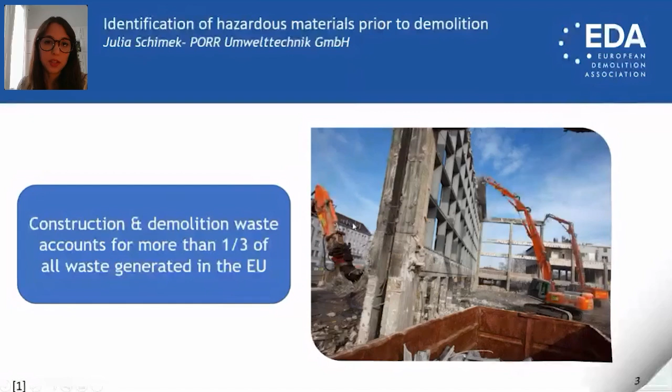So construction of buildings doesn't only generate waste during the building process, but most of the waste is actually generated when buildings are demolished. So more than 1/3 of all European waste generated is construction and demolition waste. You can see the impact the proper recycling of construction demolition waste can actually have on a goal of achieving a circular economy. But how does the situation actually look like in Austria?

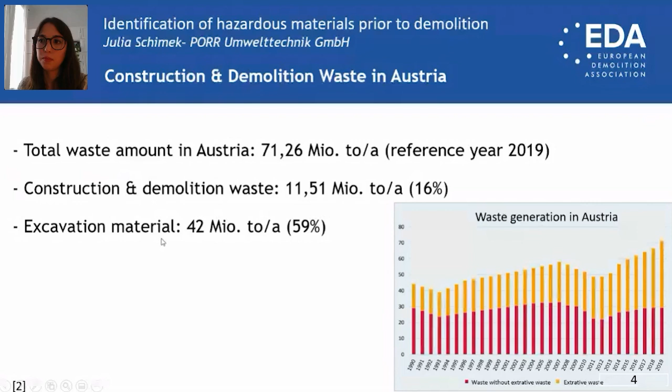So what are actually the reasons for recycling of construction demolition waste? On the one hand, the generation of reusable materials, as you use construction demolition waste, you recycle it and produce recycled product, which can then be led back into the construction sector. Second, you therefore decrease the resulting waste, which is especially important nowadays in order to save landfill volumes. And also in Austria, it is already very difficult to receive a permit for landfill sites, and it won't really get much easier in the future.

Furthermore, you can also achieve a reduction of environmental impacts and also save primary resources. And you also minimize costs by using the resources more efficiently. And in case of a proper recycling with even selective dismantling, you can also generate sorted fractions of construction demolition waste. So for example, concrete, and mixed waste fractions will be decreased. And the better the waste fractions are sorted, the easier will be the recycling afterwards and also less costly.

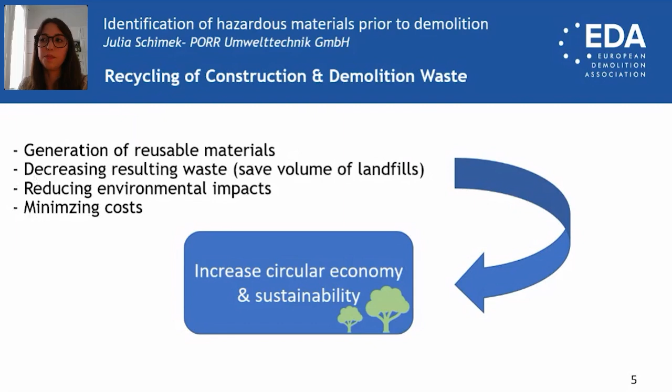So in order to enhance circular economy, we should not only take into account the life cycle of the building, but also the life cycle of the building material. At the moment, there are actually two prevailing treatment ways after demolition. On the one hand, landfilling, and on the other hand, recycling construction demolition waste. But when having in mind the European waste hierarchy and also a sustainable approach, recycling should definitely be favored.

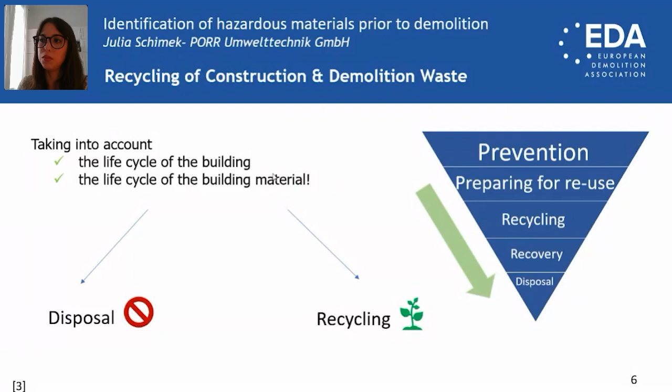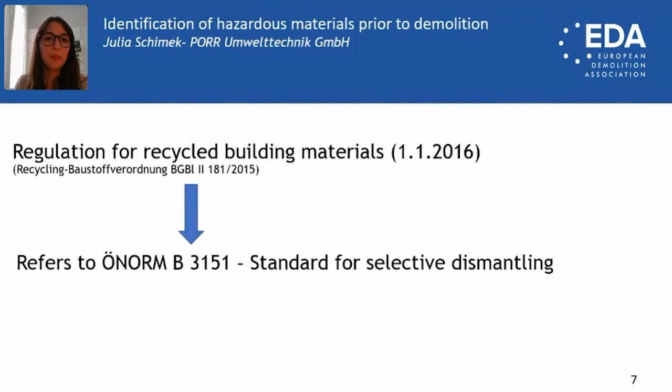So in order to enhance a circular economy, it is inevitable to set up regulations which address the production, but also the use of construction demolition waste, so addressing really the whole cycle of these materials and not just one point in the cycle when producing recycled construction materials. So in Austria, we have the regulation for recycled building materials, which has been introduced in 2016. This regulation also refers to a different standard, which addresses selective dismantling like the Austrian standard B3151, but I will go more deeply into the topic later on.

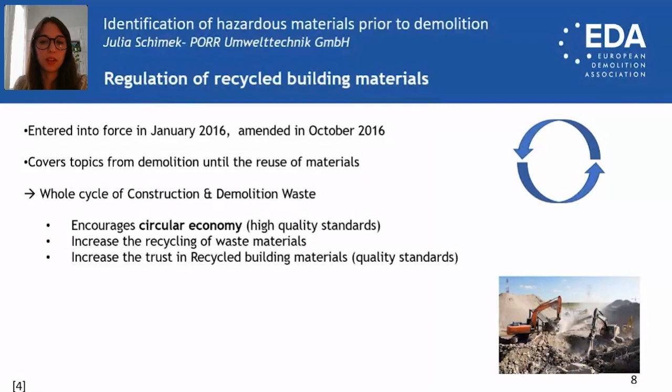So this regulation was introduced in January 2016 and has already been amended in October 2016. With that amendment, the possibility of reaching an end-of-waste status has been introduced according to the European Waste Framework Directive. And with that possibility, Austria is actually one of only very few European countries having an end-of-waste criteria for construction and demolition waste. This regulation also introduced high-quality standards for recycled building materials, which should also increase the trust in these materials and therefore increase the recycling again.

So now I will go deeper into the topic of this regulation, so the sections it actually covers. So first of all, the duties during construction demolition activities. The regulation lists requirements that have to be met during demolition activities. So for example, it specifies when and under what conditions an investigation for pollutants has to be conducted. And furthermore, the obligation for dismantling and separation of waste streams also arises from that regulation. So only non-hazardous waste is allowed to be used to produce recycled building materials, and hazardous substances and materials like asbestos, for example, as well as other impurities have to be removed prior to the treatment step of the waste.

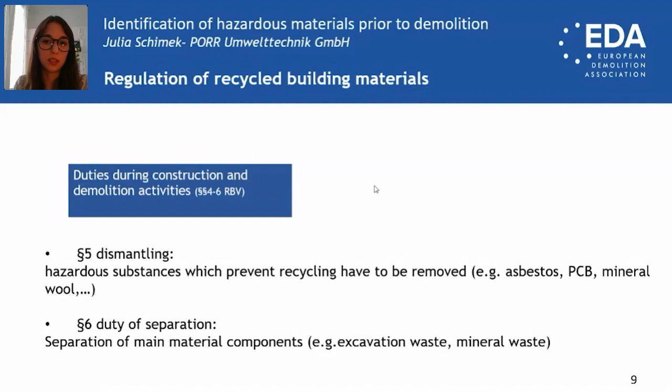Then the regulation also covers the production and use of recycled building materials. This section actually specifies that recycled building materials are only allowed to be produced from certain waste types, which are listed in Annex 1 of the regulations. So for example, concrete waste. Hazardous substances are prohibited from the production of recycled building materials, as I have already mentioned.

And in Annex 2 of the regulation, you can also find relevant quality requirements which have to be met by producers of recycled building materials. So thresholds for total contents and also for eluates exist for different types of quality and also for different types of recycled building materials.

The regulation also comprises areas of application for each quality and for each type of recycled building material. And it also mentions bans for the use. So for example, specific materials can only be used in bound applications, whereas other qualities can also be used unbound.

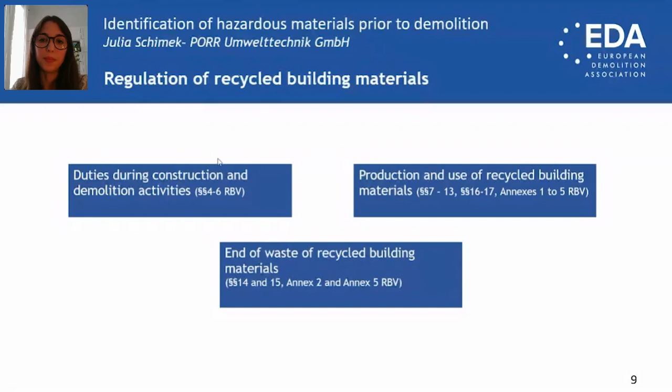And for the first time, it was also possible to reach an end-of-waste criteria, but just in case a recycled building material reaches the best quality class UA, and the recycling material has to be handed over to a third party. Just then the waste status ends, and not before.

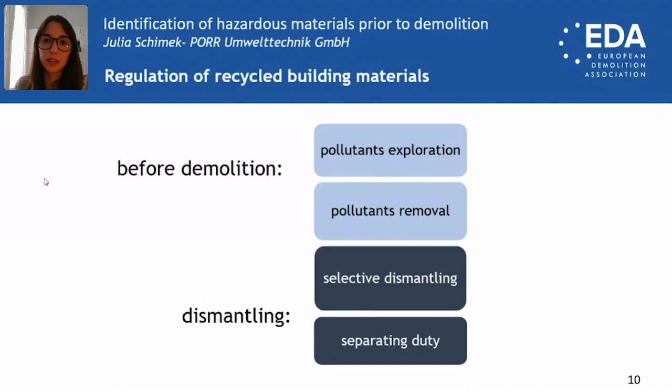So the regulation covers topics before and during demolition or dismantling. And for these single activities, the regulation refers to other standards. So in this case, to the Austrian standard B3151, which also includes further details on the single steps and also documents for each step which have to be filled out.

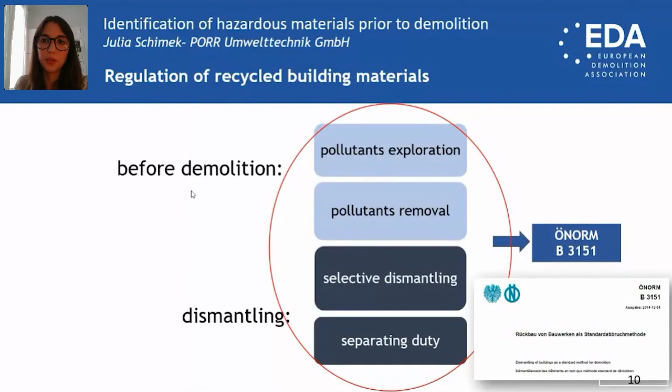So the following steps are covered by the standard. It starts with an investigation of pollutants which has to be carried out. Then a concept for dismantling has to be prepared. Afterwards, the preparatory dismantling can start and the approval for dismantling is given. And finally, the mechanical dismantling can also start. We'll now go more into detail in each of these single steps to explain it a little bit better.

So first of all, the investigation of pollutants serves the assessment of the contamination of construction objects with building pollutants. So you not only consider pollutants, but you also take into account non-hazardous impurities. Prior to the demolition of a building, this investigation of pollutants has to be carried out in case a total of more than 750 tons of demolition waste will be produced in a demolition project. However, excavated soil has to be excluded.

The investigation has to be carried out in accordance with the standard B3151. And it has to be carried out by an expert of demolition. And in order to become such an expert, you have to attend an educational course. And you also need a fundamental education in chemistry and construction technology. A list of these competent persons is published online and can be found on the internet.

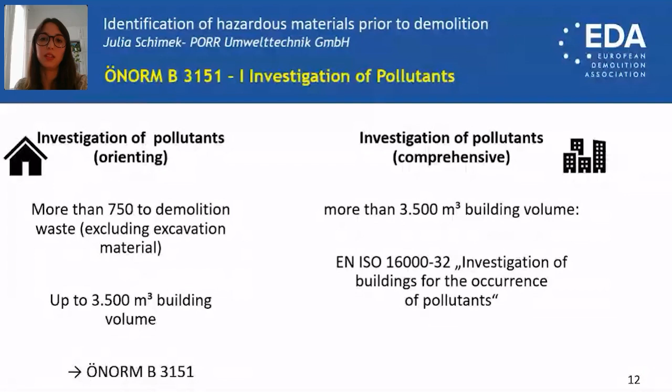So it is important to differentiate between a pollutant, which is hazardous for humans and also for the environment, and mere impurities, which just make the treatment and recycling of other mineral waste difficult or even impede the recycling process. Both materials have to be removed prior to demolition, but the removal of these materials will be different depending on the hazardous properties, of course.

So let's take, for example, mineral wool. You can sample it and you can identify by analyzing it if this wool is hazardous or non-hazardous by checking its solubility or its fiber geometry.

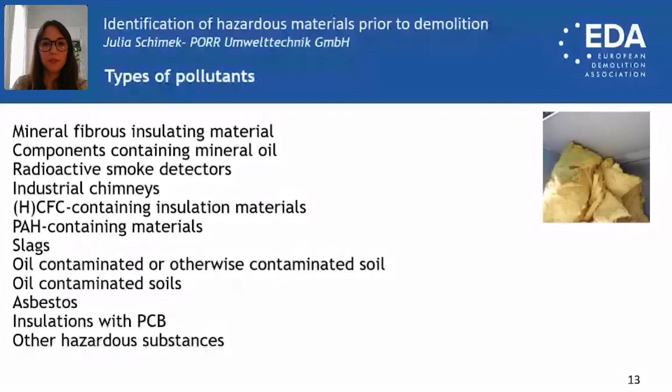Another example are also insulation boards, which can contain HBCDD or CFC. There are actually thresholds which indicate if the material is hazardous or not, and you can then again identify the hazardous properties by sampling and analyzing them. So if you are insecure if a material is hazardous, the analysis will actually show whether or not this is the case. You then have to fill out a document, which you can see on the screen now.

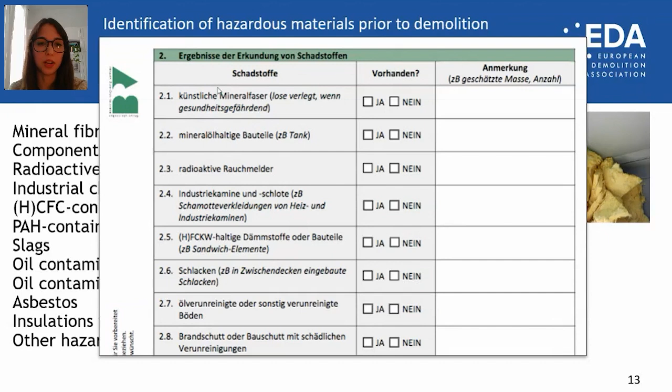This one is taken from the standard B3151, and you have to cross either if a pollutant has been detected in the building or not. You can also give an estimation on the mass or amount of elements containing these hazardous substances. So here it says, for example, mineral oil containing elements or insulation material. So you can give further information on these materials.

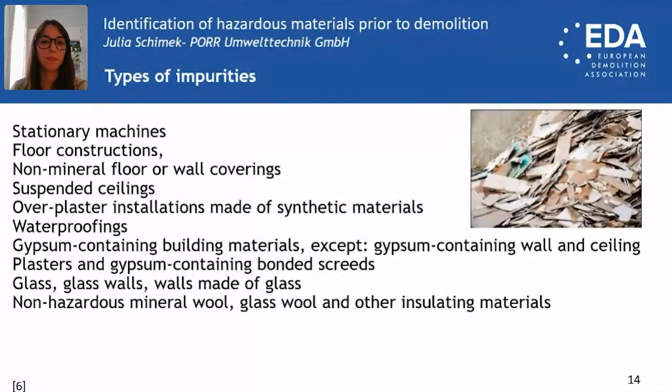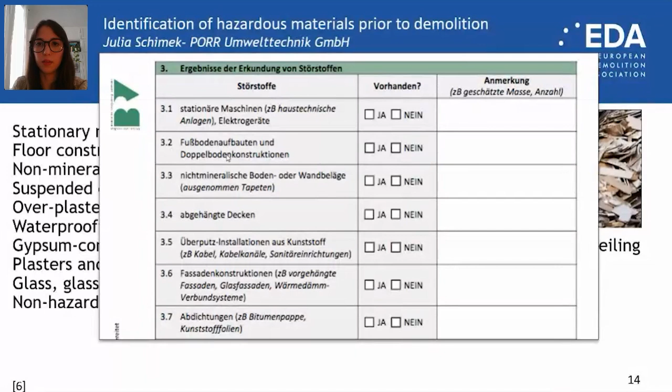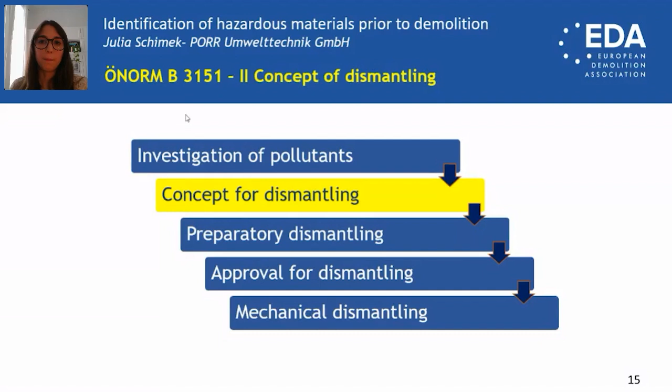The next step is the preparation of a concept for dismantling. So what are actually the reasons for selective dismantling? Many scientific papers have already concluded that selective dismantling is really important for construction demolition waste in order to increase the recycling and to be able to achieve a proper recycling. It can maximize the amount of waste being recycled as you remove hazardous substances prior to demolition, which will enable a big amount of, for example, mineral construction demolition waste to be recycled.

With pre-sorted waste, you also optimize the sorting of the waste at the recycling plant. You minimize the mixing up of different waste streams and also waste qualities, and you analyze prior to the demolition whether or not a substance is hazardous, and therefore you also prevent the emission of pollutants to the environment, like CFCs, which can be found in insulation materials.

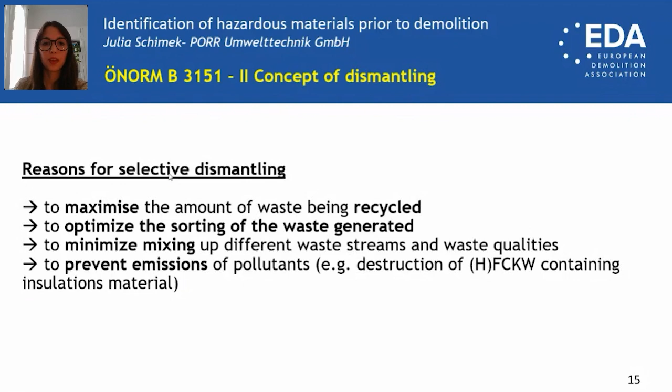The concept for dismantling has then to be prepared. It is actually a planning document which includes the steps you undergo to dismantle and demolish the building. You have to estimate the amount like for concrete, wood, metals, and every other main component of the building. A main component is if it has reached more than 5% of the volume of all materials to be demolished in this building.

And in case you transport the construction demolition waste to your recycling plant, you also have to hand over this concept of dismantling in order to prove that the mineral waste is free of these hazardous substances, and that you also show that the substances and the hazardous materials were removed before transporting the construction demolition waste to the plant.

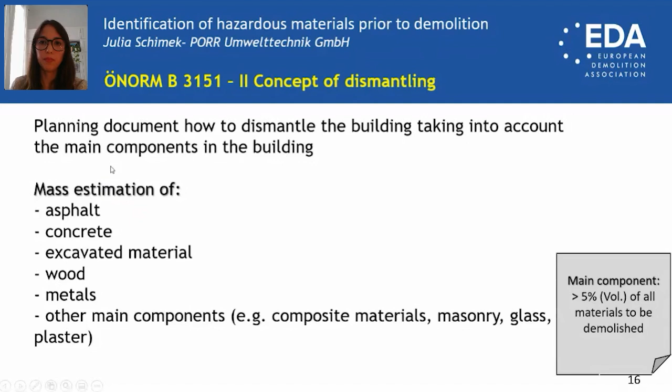So now you finally start with the preparatory dismantling by clearing out the building, remove the pollutants, and also remove the impurities you have detected during the investigations of pollutants. On the picture, you see an example of PCB containing joints which had to be removed prior to demolition of a building in order to recycle the mineral waste afterwards.

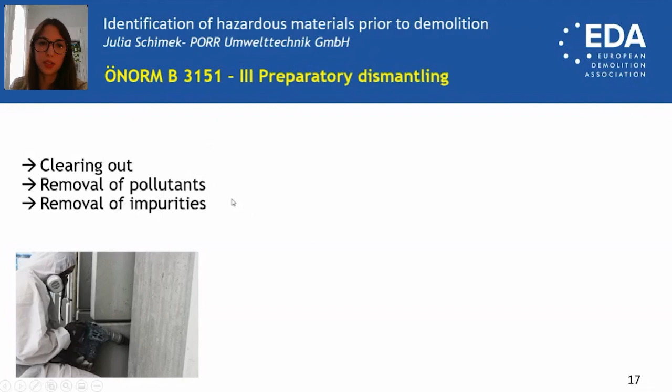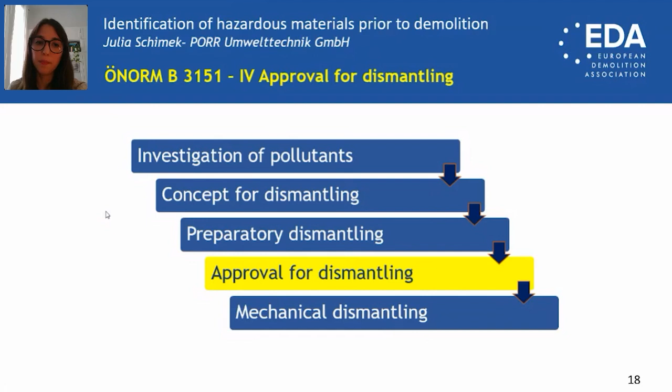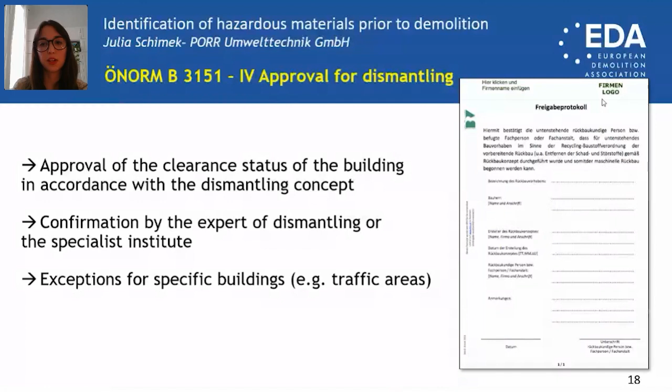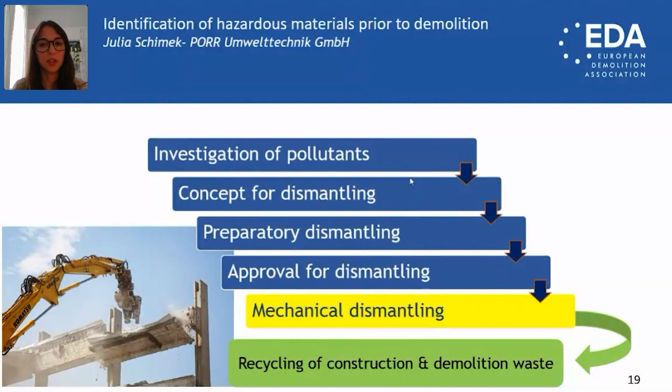Then the approval of the clearance status of the building in accordance with the dismantling concept has to be given. This has to be done either by the expert of dismantling or the specialist institute, as I've already said before. And then you also see on the screen this document, which has to be signed by this expert of dismantling or the specialist institute. And afterwards, you have finally reached the point of starting the mechanical dismantling process, and the recycling of construction and demolition waste can finally start.

So by removing hazardous materials and impurities prior to demolition, you can achieve a much higher quality of construction and demolition waste. These waste streams can be then easily recycled and finally be used as construction materials for new houses. And with this step, you close the loop and secondary products will substitute primary ones.